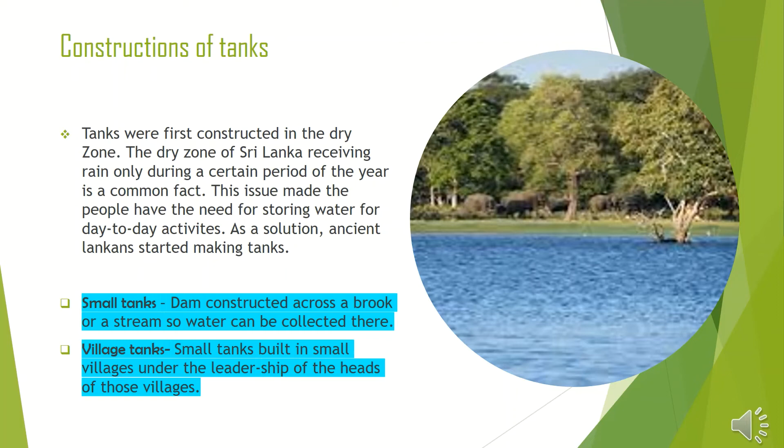Large tanks. Not a single drop of water received from the rain should be allowed to flow into the sea without making any use of it, said King Parakramabahu I. As population was increasing, usage of water too increased. Large tanks were constructed to store more water, and the water could be sent to smaller tanks too.

Kings helped in making these tanks. Two of the kings are King Parakramabahu I and King Vasabha. It is said that King Vasabha was the first king to start making large tanks.

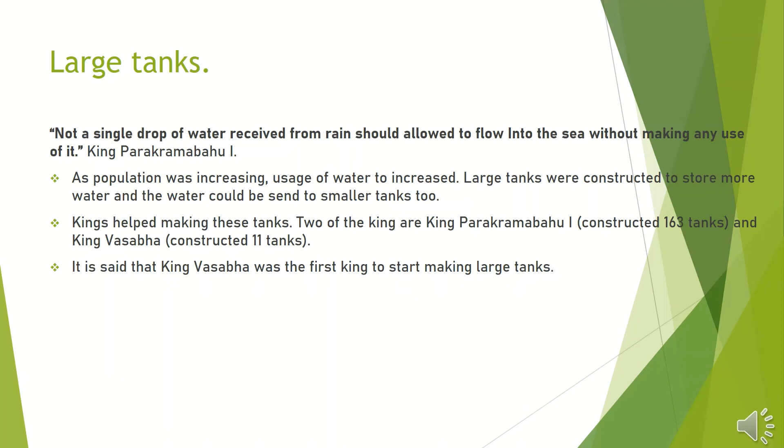Advantages of making large tanks: a huge volume of water could be stored, small tanks could be provided with water from large-scale tanks, floods could be controlled, and the technology of constructing long canals developed.

For your knowledge, Parakrama Samudraya in Polonnaruwa is so far the biggest tank in Sri Lankan history. It is said that it was made by combining 5 major tanks.

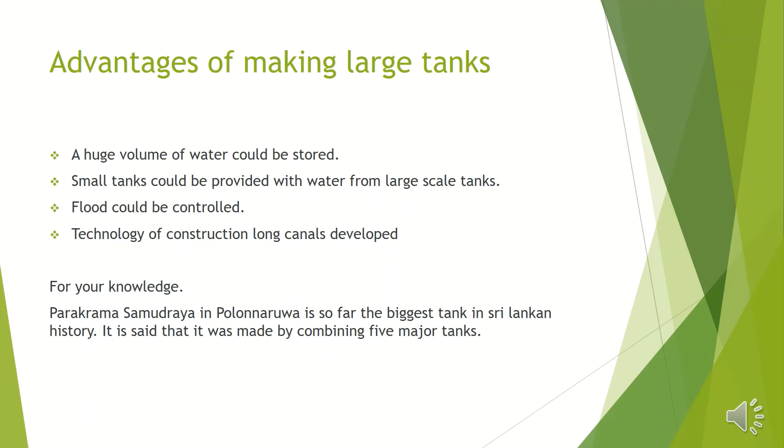Barriers when constructing large tanks: it should be properly maintained, a very strong dam should be constructed, a suitable place should be selected to build it, thousands of workers should be employed to construct it, and an adequate amount of food should be provided to the workers.

Key features of a tank. There are 5 main features: sluice, Bisokutowa, breakwater, inner spill, and outer spill.

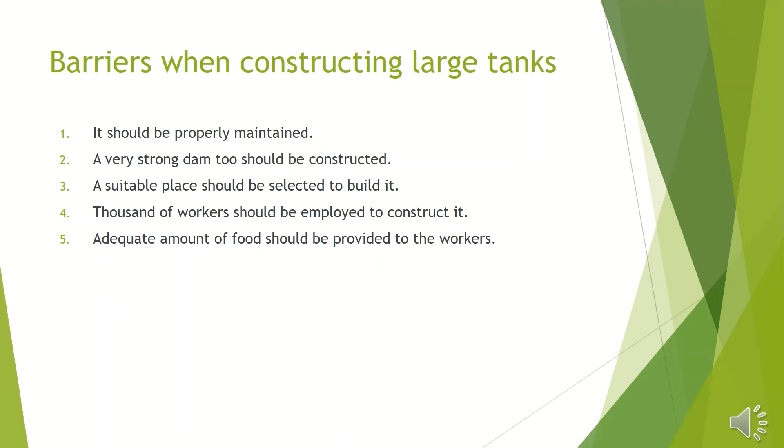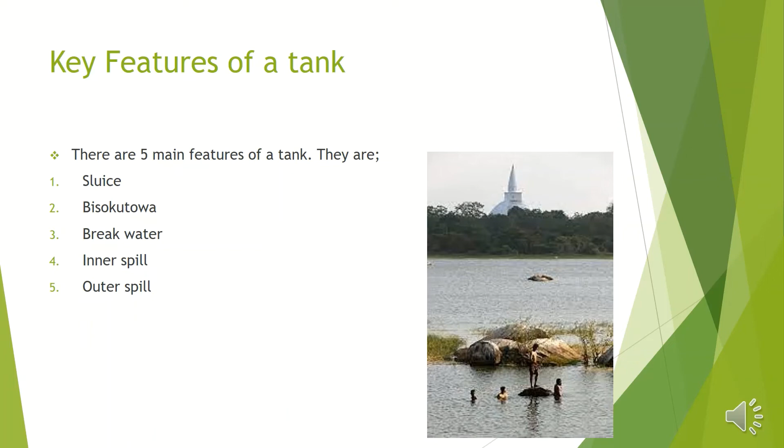Sluice: it was made to let out the water from the dam to a canal. Most tanks had 2 sluices, the upper sluice and the bottom sluice. The bottom sluice was created at the bottom of the tank so that all the water in the tank can be let out into the valley.

This helped desilting the tank. The upper sluice was constructed a little above the bottom sluice, made to let a certain amount of water out to a canal or a valley. The sluice is called Sorowwa, the bottom sluice Mada Sorowwa, and the upper sluice Goda Sorowwa.

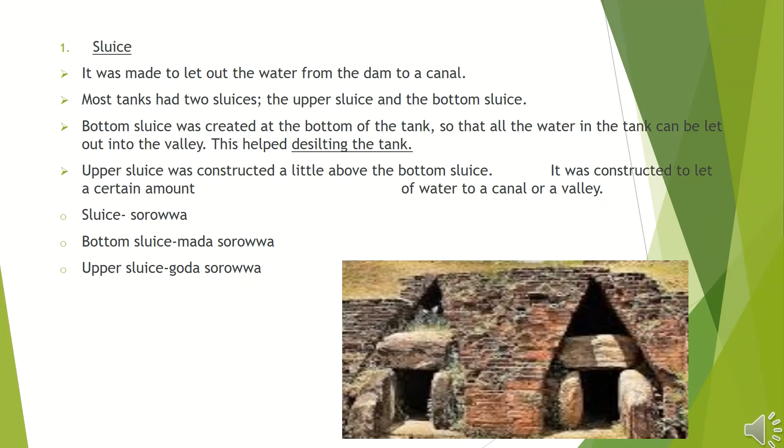Bisokutowa is constructed to let the water stored in the tank out of it in a proper regulation. It is a part of the sluice itself, constructed in a square shape from inside a tank very close to the dam. It is considered to be a unique invention of the Lankan irrigation technologists.

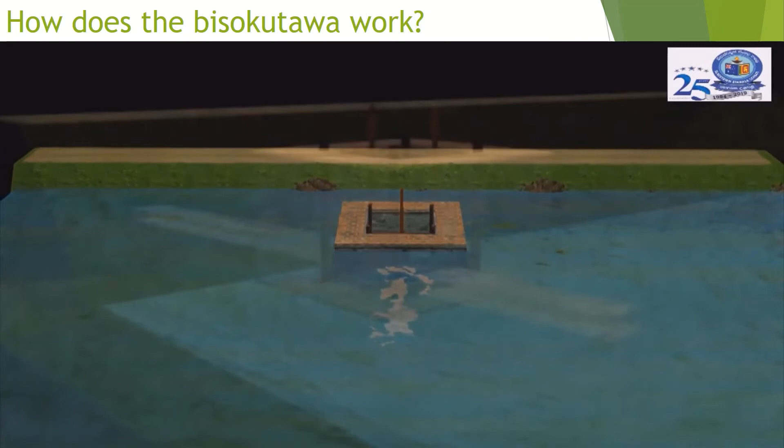Breakwater: laying stones on the surface in the inner area of the dam to prevent the dam from being washed away into the tank was known as breakwater.

Inner spill: it was constructed to let the water into the tank from other sources. A small pit has been constructed so that the silt carried with the water from outside is deposited there, preventing it from entering the tank.

Outer spill: it was constructed to let the excess amount of water out.

Aqueducts and dams. An aqueduct is a bund constructed across canals, streams, or rivers to block the flow of water and to divert it to paddy fields or other sources. A dam is a bund constructed to retain water.

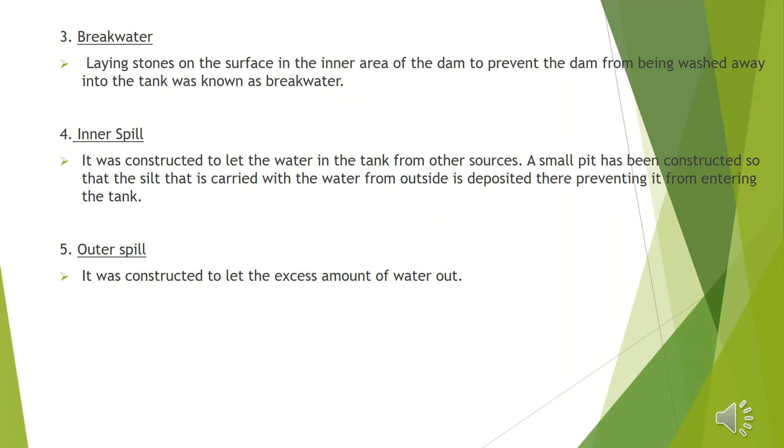There are two types of dams: makeshift dams and permanent dams. Makeshift dams are made by standing wooden poles across a current and blocking the flow of water with branches of trees, mud and sand. These dams eventually get destroyed in the next rainy season. Permanent dams are constructed using blocks of stone so that they are strong enough to withstand pressure and to be protected from erosion, made to last long.

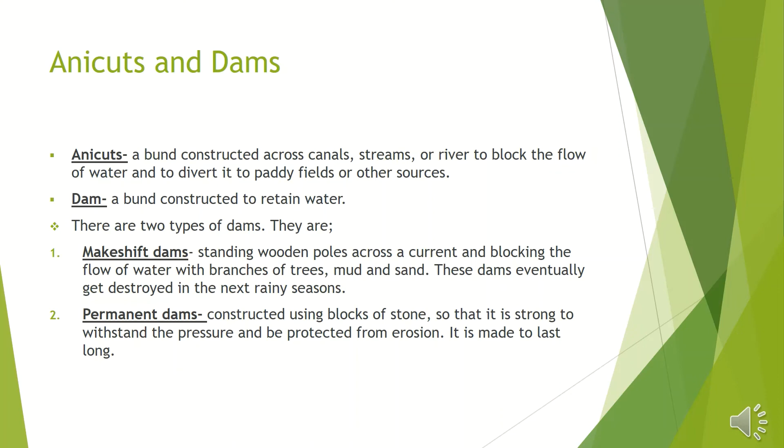Construction of canals. An artificial waterway constructed to allow the passage of boats or ships inland, or to convey water for irrigation, is known as a canal. Canals are made for various reasons, such as to carry water from tanks or anicuts to farmlands, to carry water from an anicut to a tank or a tank system, or to carry water from one tank to another or to several tanks.

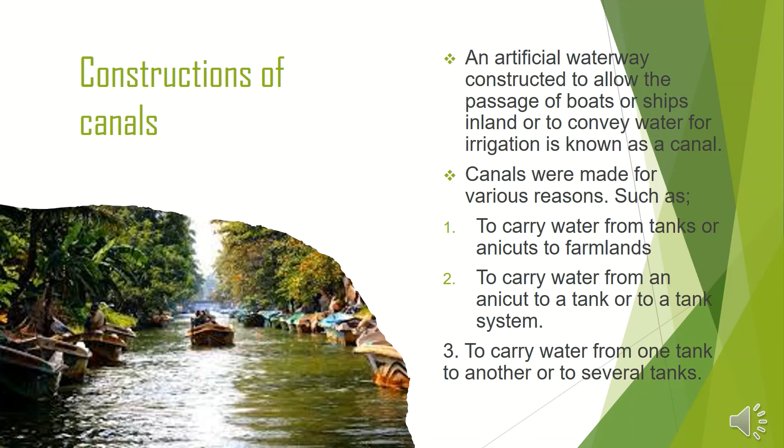Kings and the canals they constructed: King Vasabha built the Alisara or Elahara Ela. King Mahasen built the Tilavatuka or Talavatu Ela. King Dhatusena built the Jayaganga or Yoda Ela. King Agabodhi I built the Minipe Ela.

Barriers when constructing canals. Just like tanks, building canals too had difficulties, such as the problem of variation in geographical conditions. Extremely accurate measurements of the height of the land had to be obtained from the beginning to the end of the canals, along with digging the canals, maintaining correct width and depth, and building bunds.

Quick reminder: R.L. Brohier's book, Irrigation System in Ancient Lanka, describes the challenges that had to be overcome and how they were overcome.

Ponds were constructed for the purpose of storing water required for human needs. They were constructed by digging the soil and building stone walls around it to protect the banks from erosion.

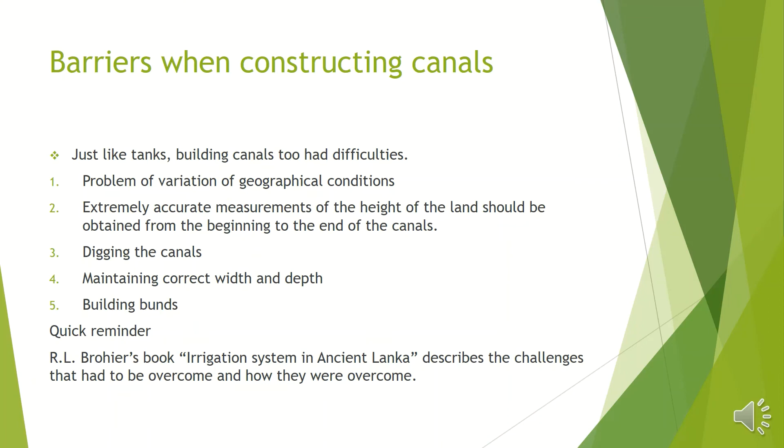Ponds' purpose: they were constructed to store water for consumption, for the proper removal of water, to add beauty, and to keep the environment cool.

Ways ponds were designed: tunnels and drains were constructed to direct rainwater into the ponds. Some ponds were designed to be filled with rainwater, while others were designed to be filled with water obtained from some other source. Some were constructed by building stone walls on rock plains to collect rainwater. Ponds were made in various shapes too.

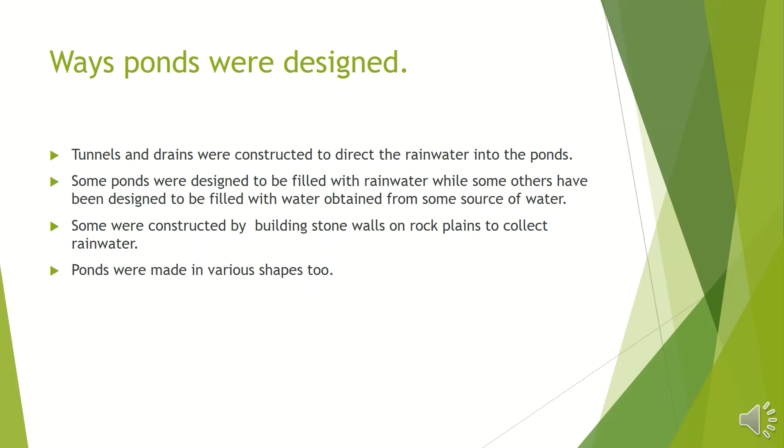Construction of water gardens. These gardens had plants and trees grown, and were used for the purpose of spending leisure time or doing sports. King Mutta Siva is said to be the first king of Sri Lanka to construct one. The garden is said to be called Mahameghavana, which later changed to Mahamevuna Gardens. King Devanampiyatissa later offered this garden to Arhat Mahinda and other bhikkhus.

Nandana Uyana and Padmaswara. When Arhat Mahinda Thera arrived in Sri Lanka, there was another garden known as the Nandana Uyana, located in Anuradhapura. He preached Dhamma in this garden, causing it to be considered the place which made Buddha Sasana shine in this island. Therefore, it is also called the Jyoti Gardens.

King Kutakanna Tissa constructed a garden named Padmaswara.

Types of water gardens: Royal gardens, which were constructed for the royalty or the royal family. Monastery gardens, which were built for the bhikkhus for the purpose of preaching Dhamma and engaging in meditation. The Abhayagiri temple and Jetavana temple gardens in Anuradhapura are good examples of these.

Key features of water gardens: planning the garden to suit the nature of the land, constructing a well-planned road system within the garden, beautifying the garden, creating a pleasant environment, and maintaining the garden.